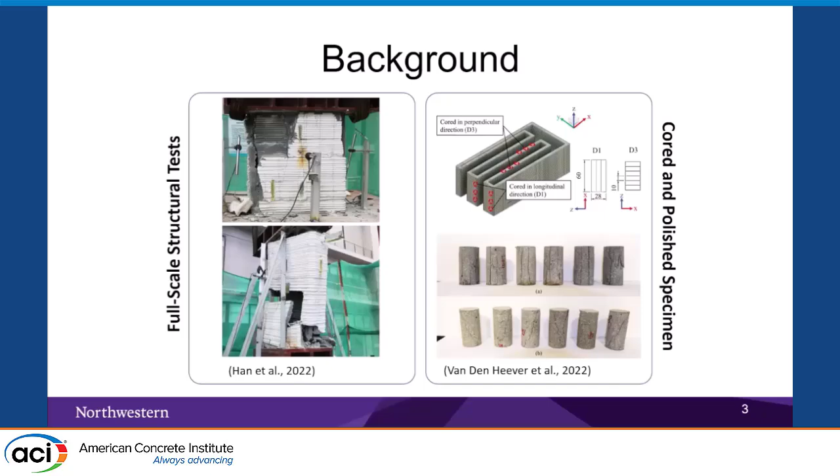The second part, related to cutting or coring samples out of 3D printed structures, eliminates the 3D printing features. So eventually we are converting the 3D printed element into kind of a cast element. That's why we wanted to go a step further in this matter.

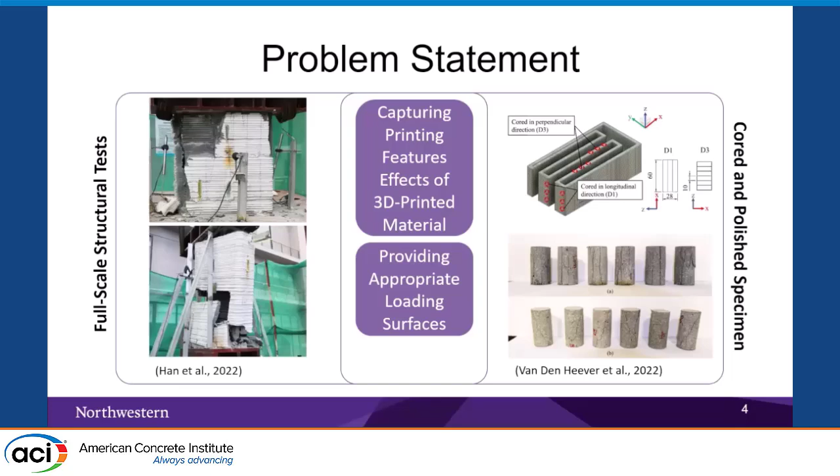So what we did, we wanted to capture the printing features' effect on the mechanical characterization of the material. This is not easy, because if we want to test a 3D printed structure keeping the printing surface features, then we need to provide appropriate loading conditions, and also work on small scale samples first, then we can scale up.

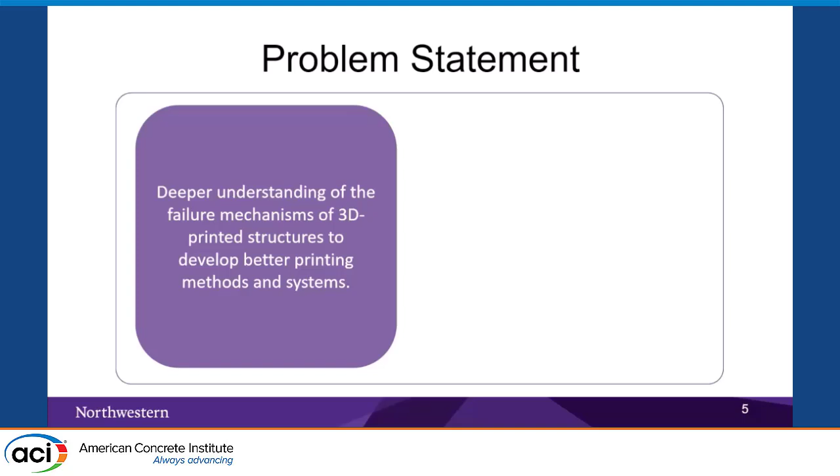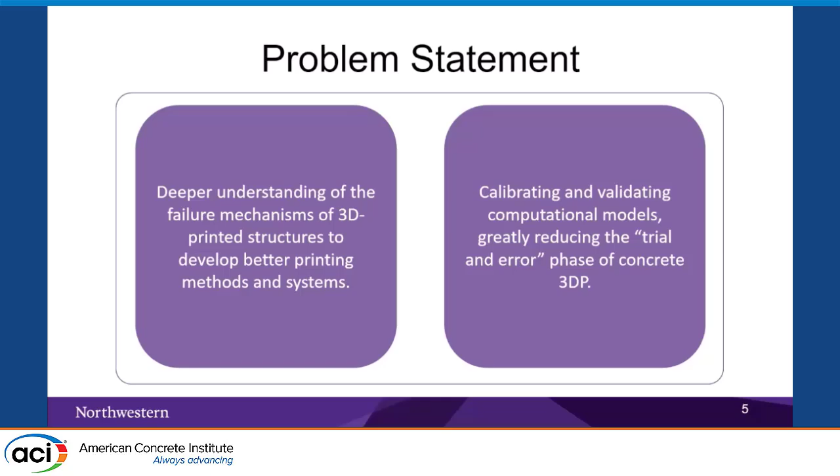We need to do this to deeply understand the failure mechanism of 3D printed structures, to develop better printing methods and systems. The second step is to calibrate and validate our computational models, which cannot be easily done using just experimental data. We'll need to do several trials to do it experimentally.

In terms of the experimental program, we have two steps. The first is to develop a nano-modified ultra-high performance concrete mix, and then we can do our mechanical characterization using uniaxial compression, split tension test, and flexure test. I'm boxing 'printable UHPC mix' based on our latest accepted paper for publication.

We got to the point that we cannot say we have a printable mix on its own. This printable mix must be related to a specific printing system. When we changed the nozzle shape from rectangular to circular, we got different shape stability. When we changed the extrusion system from piston type to an auger system, we also got different printing shape stability. So when we say we have a printable mix, we need to relate this to a specific printing system.

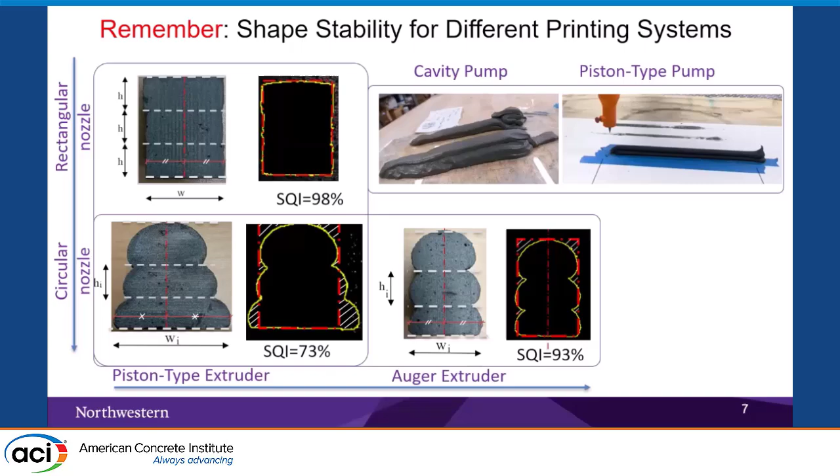Also, looking at the effect of pumping, when we used different pumps - cavity pump versus piston type pump - we got the same mix to be printable using the piston type pump, which is no longer printable using the cavity pump. That's why I'm boxing 'printable', because it's printable for a specific mix, for a specific system.

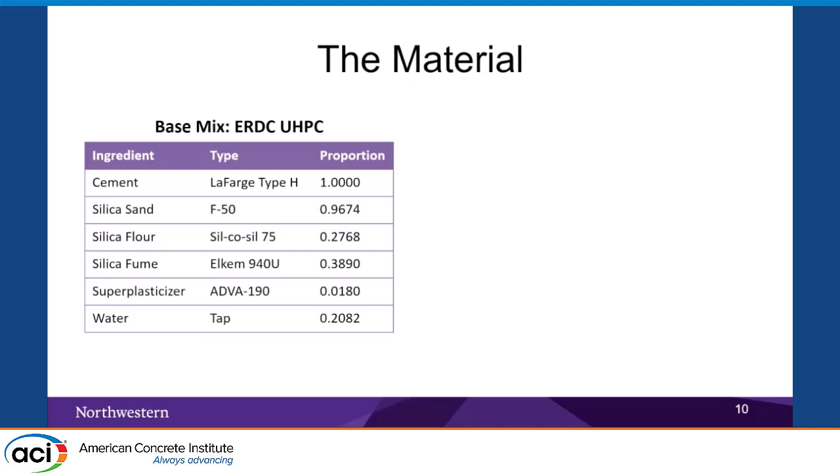For the materials and methods, we use the base mix of ERDC UHPC mix, which consists of cement, silica sand, silica fume, silica flour, and super plasticizer. I used ADVA 190 to develop this mix, and then for sure we have water.

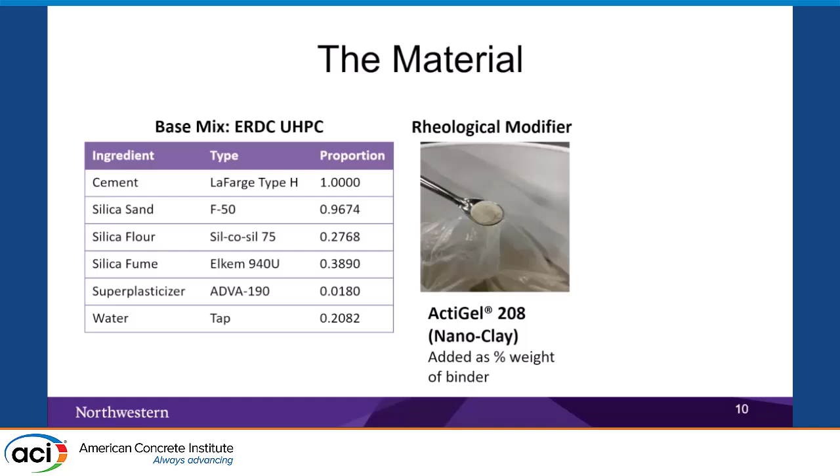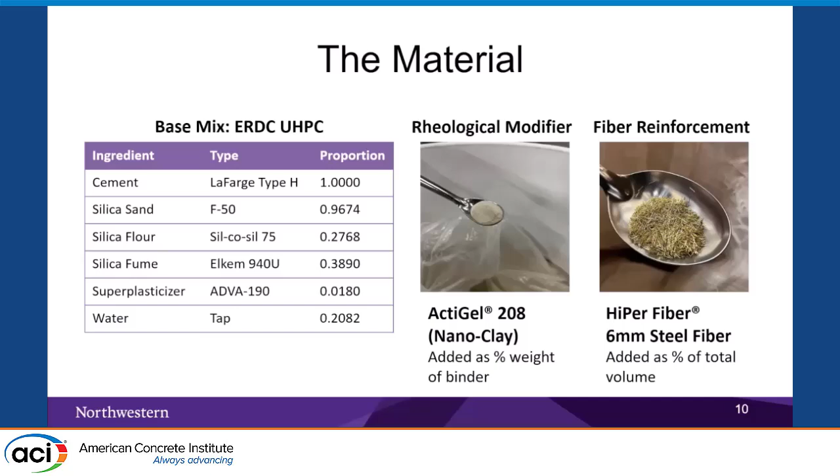We have a specific mixing procedure each time we perform this mix, and we use a rheological modifier to make it printable - ActiGel 208, which is nanoclay, at 0.7% by weight of the binder material. Also in this work, we used some samples without fibers and others with fibers, at 2% volume by volume of the fiber.

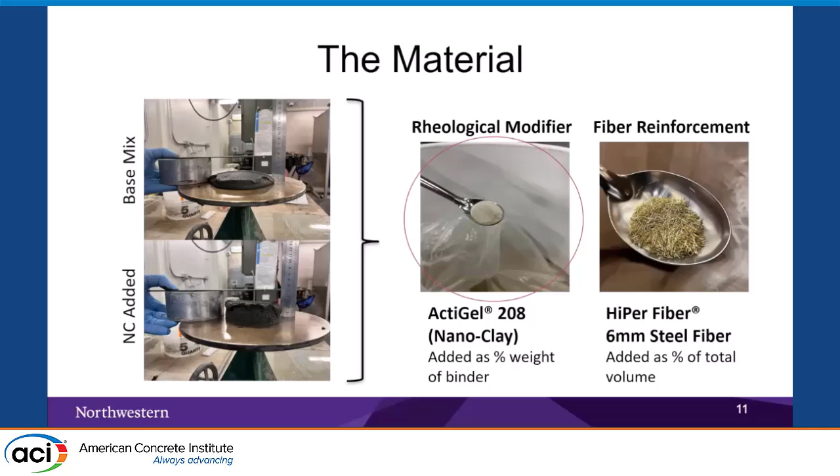However, it's a simple tool. We have also done good work in rheological characterization of this mix using different rheometers, but this is out of scope of this presentation. So I'm just showing the slump table test for our reference.

As I spoke about printing systems, at Northwestern we have different printing systems in our lab. In terms of automated machines, we have an ABB robotic arm with 6 degrees of freedom, a medium scale gantry with 3 degrees of freedom, and we recently got a large scale gantry with 4 degrees of freedom.

For the extrusion system, we have an auger system and a piston type system. And we have different pumps - a cavity pump and a TK7 pump. This is a really powerful pump, I like it really much.

It can pump the concrete really good. The good thing about it is if you calculate the rheological behavior of the mix before pumping and after pumping, they will be the same. Thanks to Dr. Kusets for bringing this to our lab.

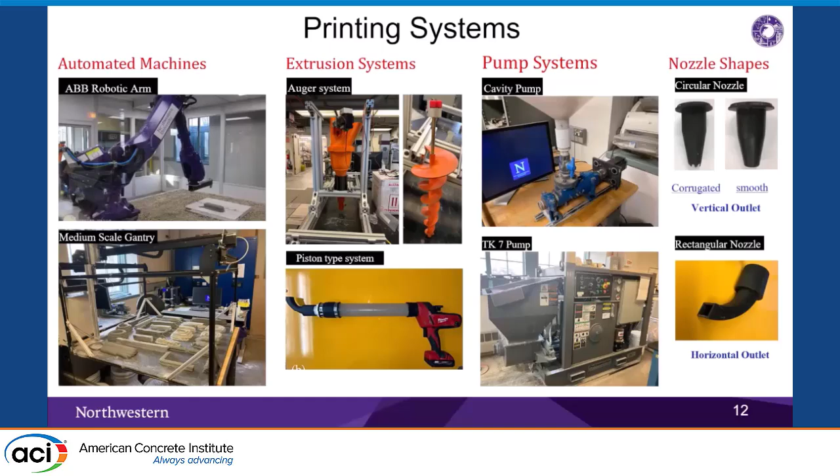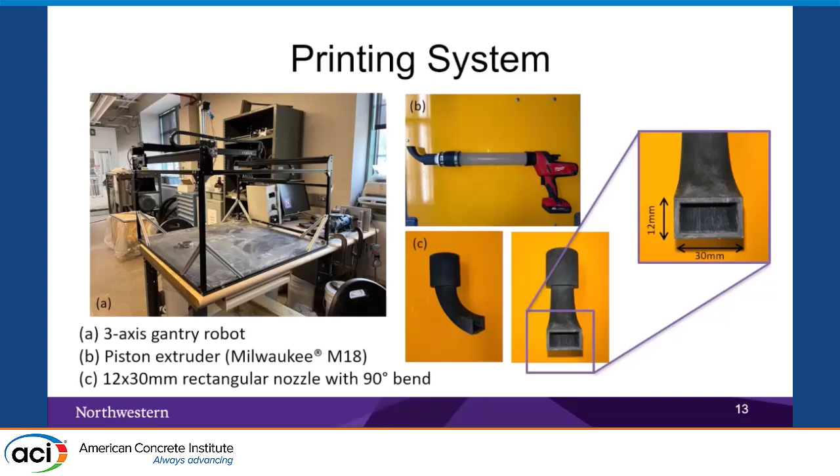For the nozzle, we have a circular nozzle and also a rectangular nozzle. In this work, I'm going to present one printing system: the medium scale gantry with the piston type system and the rectangular nozzle, with a width of 30 millimeters and a height of 12 millimeters.

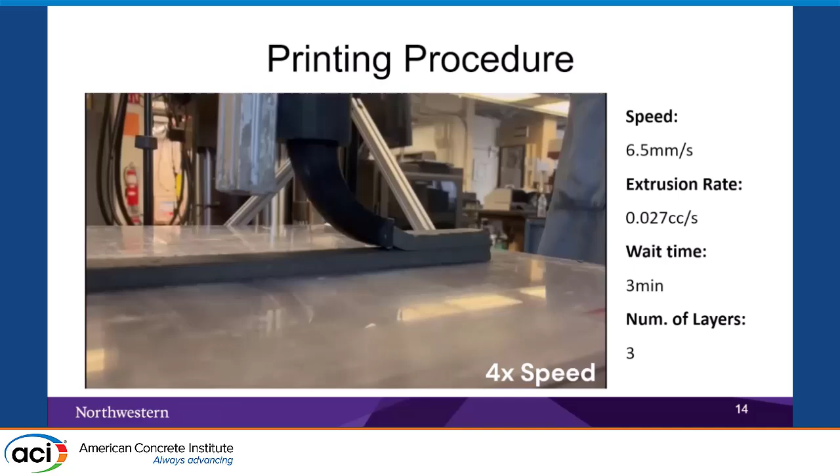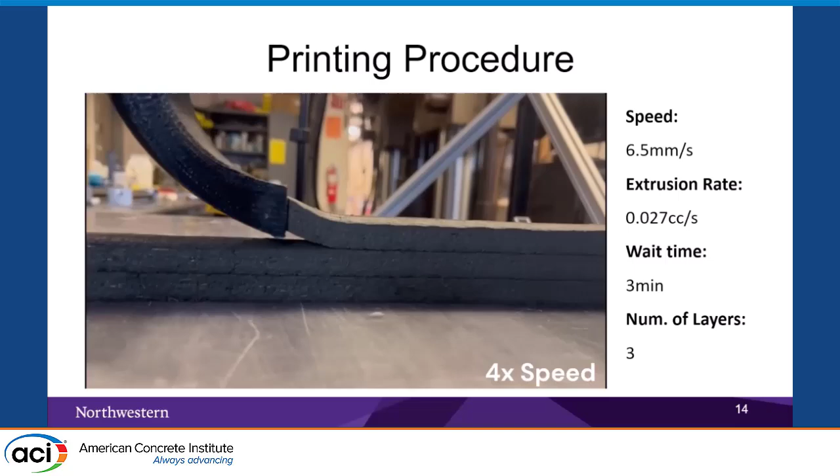This is a short video showing the quality of our printing. Here we printed 3 layers with a waiting time of 3 minutes between each layer, at a speed of 6.5 millimeters in length per second. After printing the 3 layers, we cut samples out and performed our mechanical characterization.

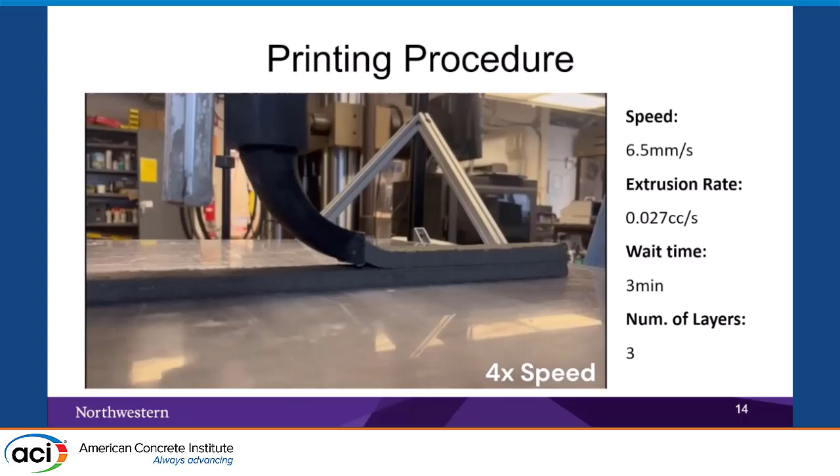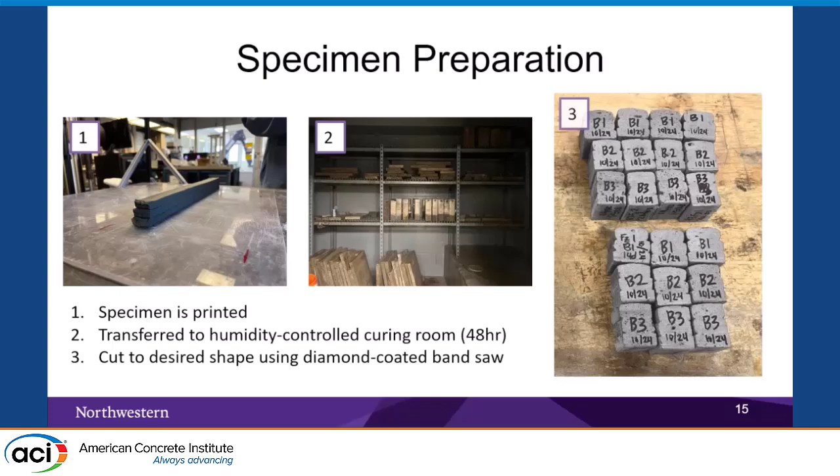The steps were: print, move to the curing room for 48 hours, and then cut samples based on the mechanical test that we're going to do.

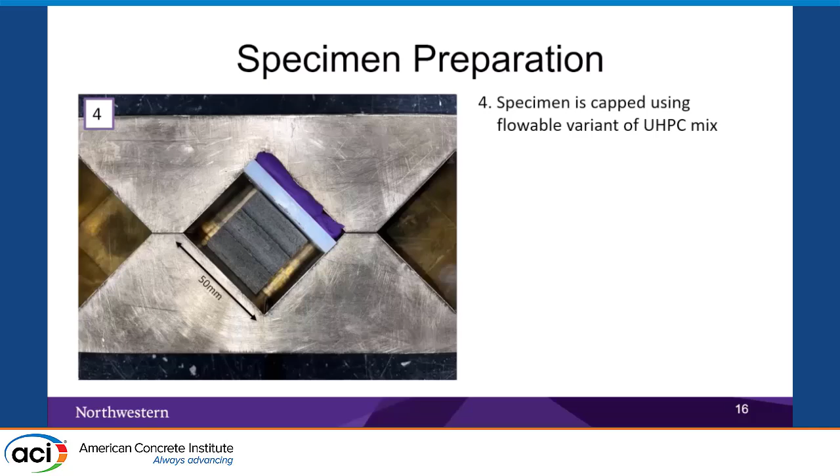We're going to use the same material for capping, but that's not easy because the gap is sometimes really small. So we need a more flowable version of our mix so we can cap the material easily. What we did was change the super plasticizer. In the base mix we used ADVA 190. To make it really flowable we used Sika Viscocrete 2100, and it makes it really flowable. You can see here in the flow table it's really flowable so it can fill any gaps, giving us good capping and eventually good parallel, smooth surfaces for loading conditions.

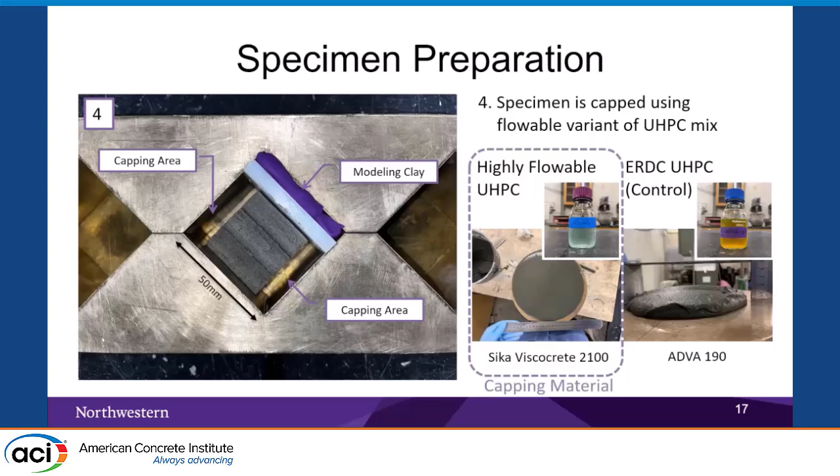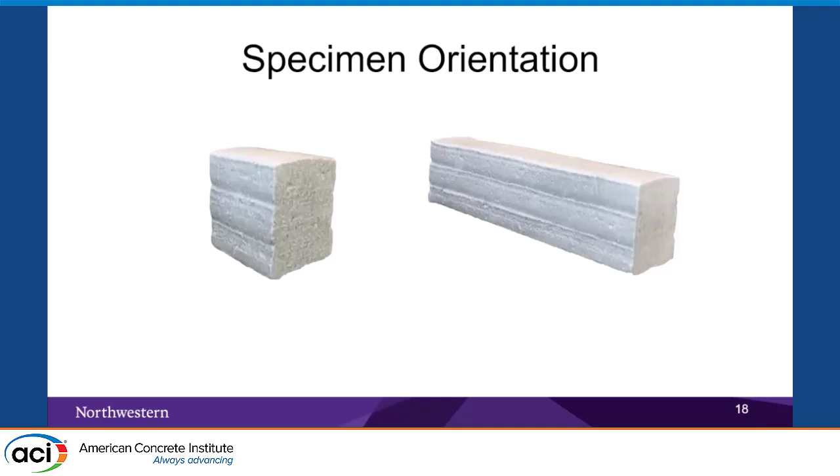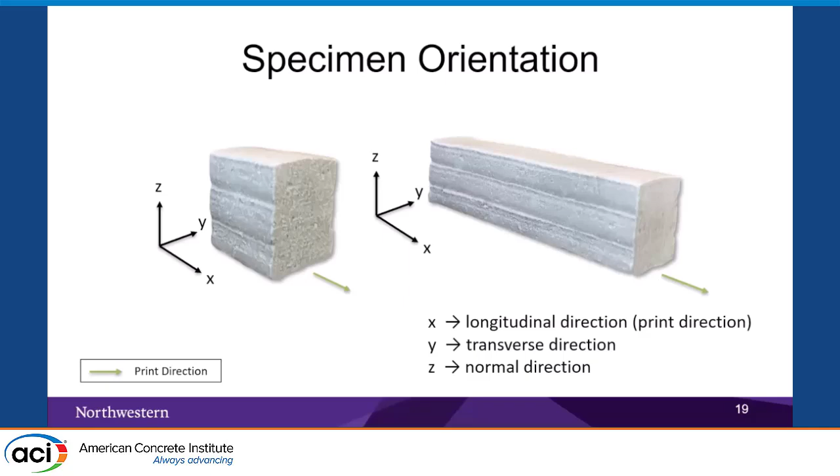This is the sample after printing, and this is a scanned version using our 3D scanner. The longitudinal direction is our X direction, the lateral direction is our Y direction, and Z direction is the vertical direction. Let's look at some of the results.

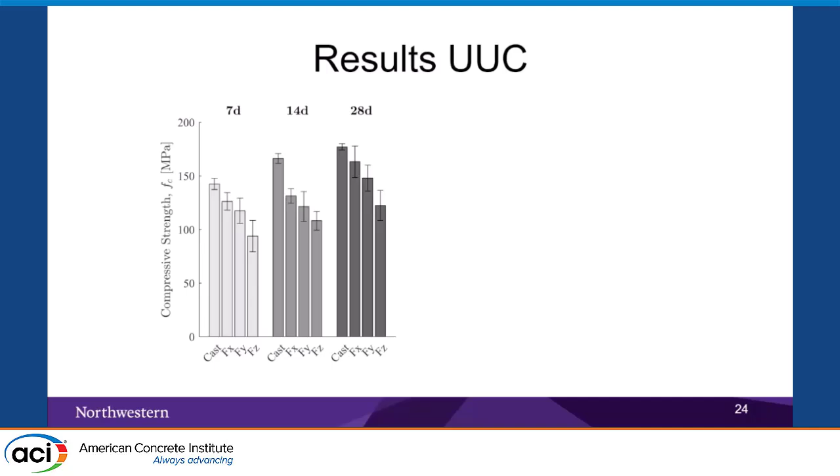When we look at uniaxial compression results for samples without steel fiber - this is the unreinforced sample - we can see a clear anisotropic behavior of the material, comparing cast samples and all other loading directions in Fx, Fy, and Fz. We have 3 ages. In this experimental program we tested more than 400 samples to ensure repetitive results. When we look at the failure mode, it's cone failure, a nice cone failure without interlayer failure.

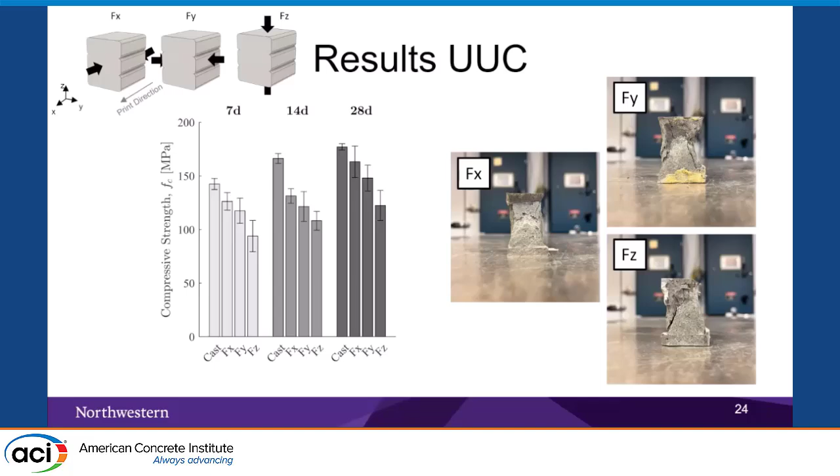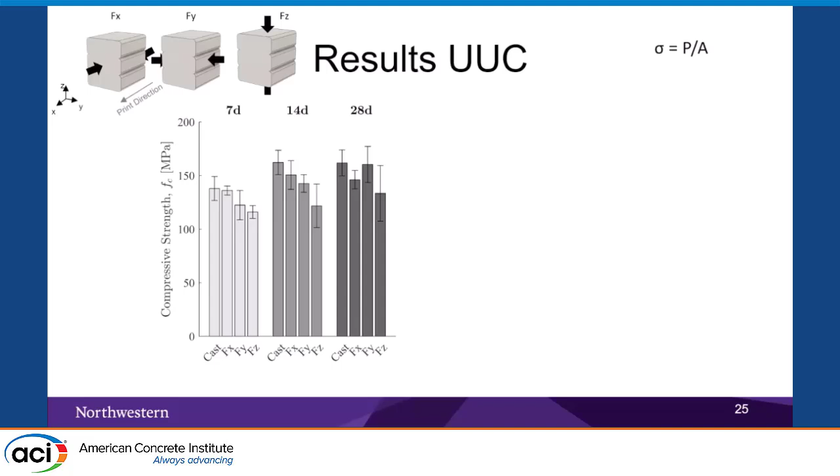Once we add fiber, we still have the anisotropic behavior of the material, but the difference is we have splitting once we add fiber, because we have a weak zone between the printed layers. Comparing with without fiber, we can see it's a cone failure here.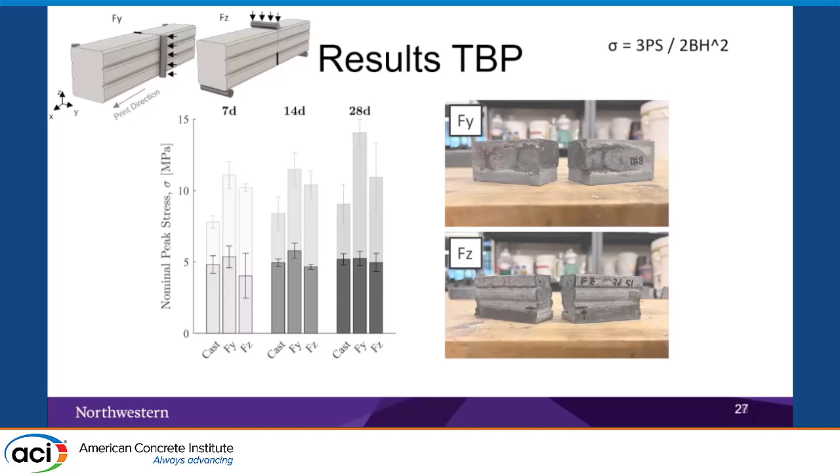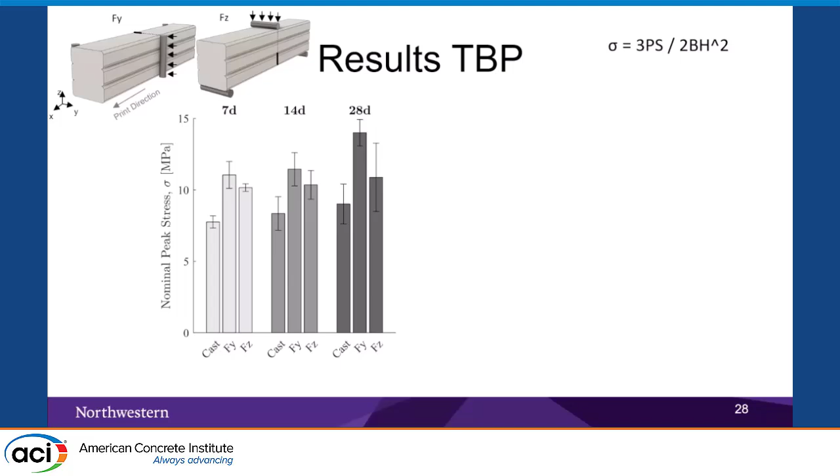When we added fiber, now we see the printed sample has higher strength compared to the cast samples, and this is because of the fiber alignment in Y direction and Z direction. Interestingly, we have a separation in the layer - you can see it in the first layer of the printed 3 layers - and that motivated us to start a new experimental program to quantify and enhance the interlayer properties using different methods. That's what we're working on right now.

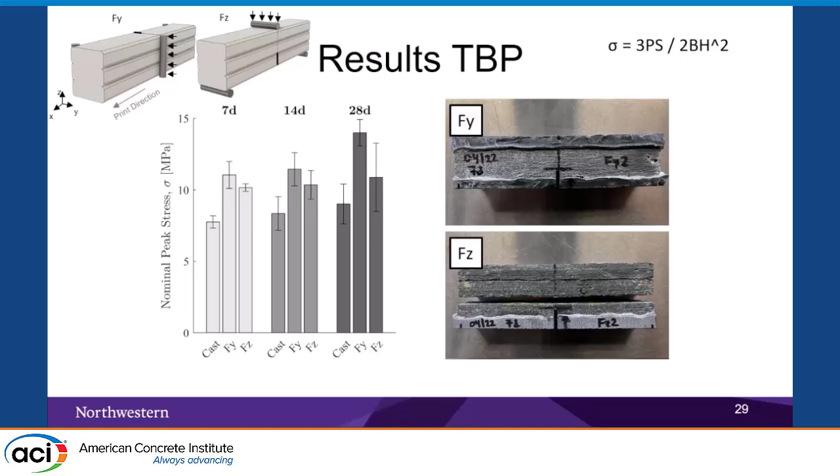Right now we are working on doing a numerical simulation of those observations to understand more what's going on when including the printing features.

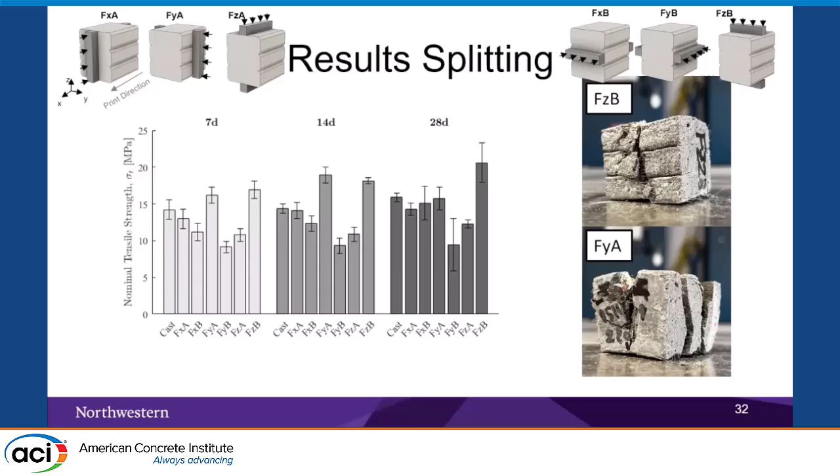Once we add fibers and load in the FY direction, we still have failure in the interlayer in the other direction as well, which also needs to be understood numerically.

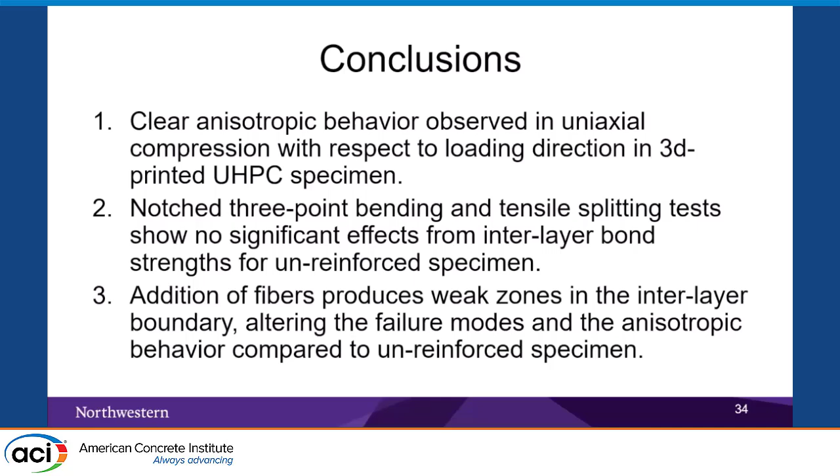Let's look at some conclusions. We have a clear anisotropic behavior when we test the uniaxial compression samples. For notch 3-point bending and splitting, we have no significant effect from the interlayer bond. But once we add fibers, it creates weak zones in the interlayer, which alters the failure modes and the anisotropic behavior compared to unreinforced specimens.

In terms of future work, we need to scale up. We have a large mixer which can be connected to the piston-type pump, and then we can deliver the material to the extrusion system, and eventually we can print.

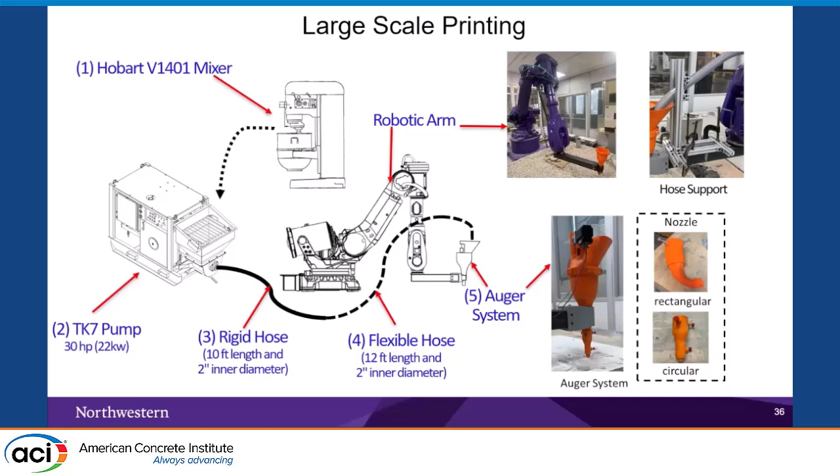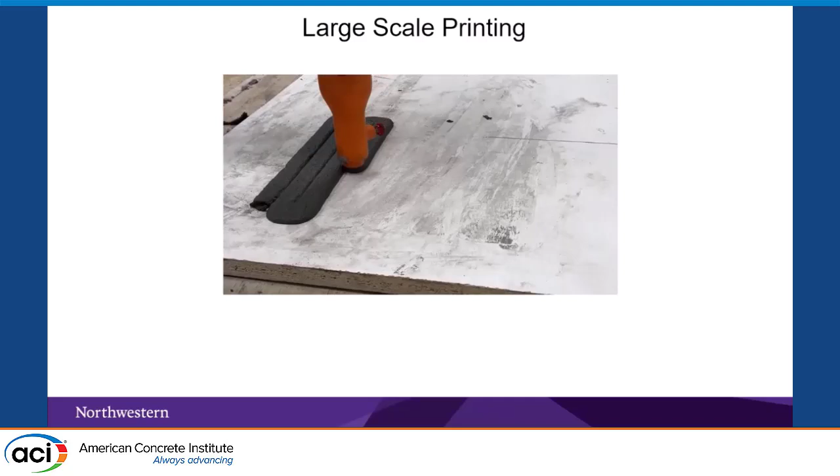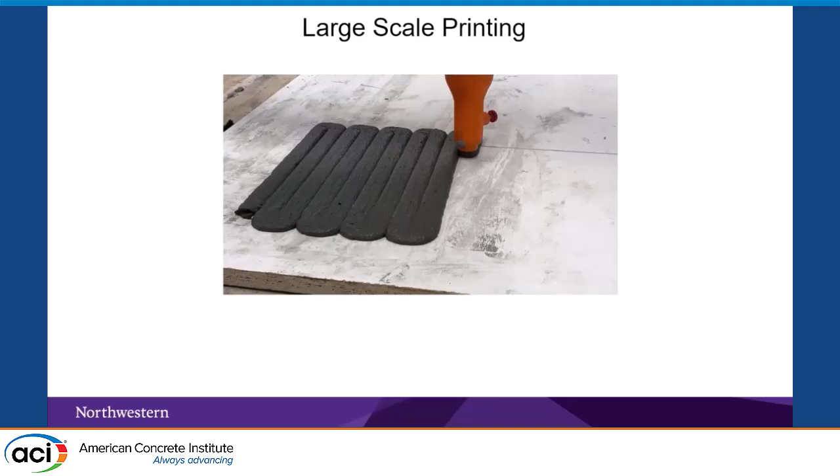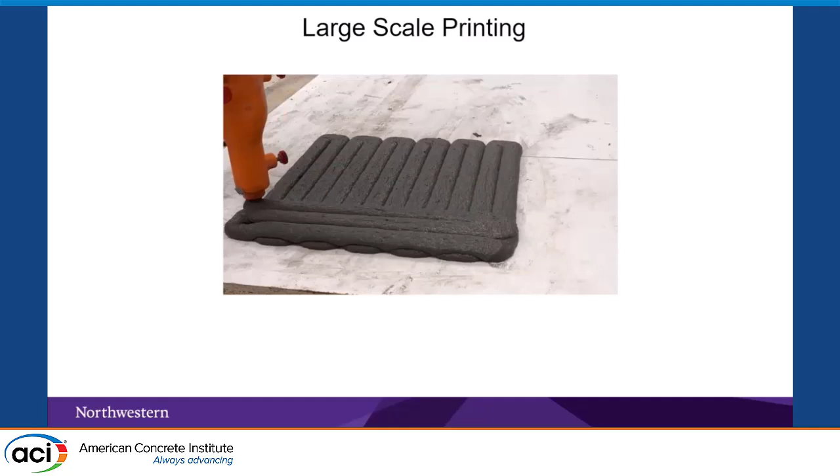Out of this, we printed slabs using the idea of laminates, where we can print in X direction, Y direction, plus 45, plus minus 45, and adapt this for slabs, especially two-way slabs, which will maximize the bending capacity of these slabs. Here the printing speed is 50 millimeters in length per second, and I think we can also increase this printing speed.